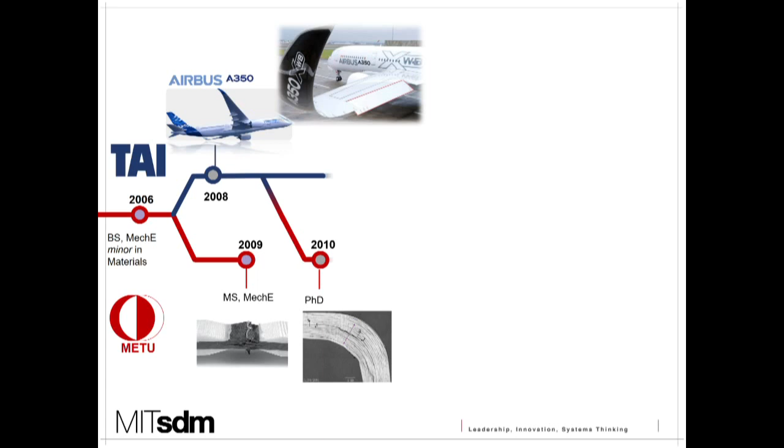Meanwhile, I pursued an MS degree in mechanical engineering, continuing to work and continue my endeavor in academics in parallel. In 2010, I started my PhD program, which was motivated by my work at TAI. In 2013, we had the first flight of the A350. Meanwhile, I also helped on other projects, the Boeing 787 and the Airbus A400M. In 2014, I graduated with a PhD.

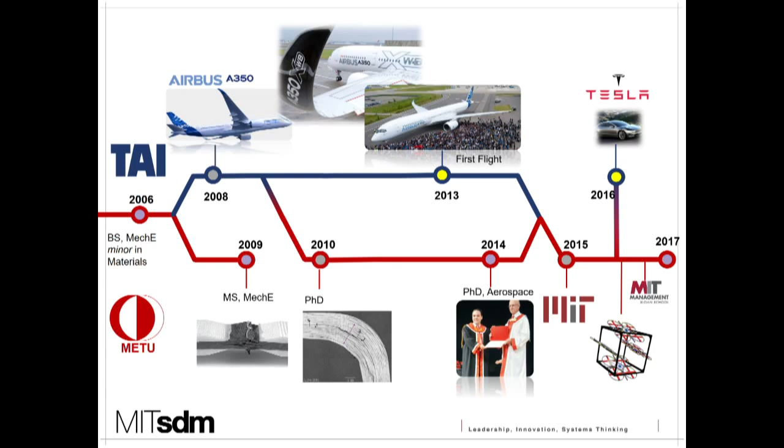In 2015, I decided to switch to the business side of engineering, so I came to the SDM program at MIT. Afterwards, in 2016, I interned at Tesla Motors in Palo Alto in the program management group for Model 3 cars. Meanwhile, I worked on different projects such as drone projects, and also worked for MIT Sloan School.

Specifically at MIT Sloan, I founded a club called the Systems Thinking Club, and I am currently conducting the president role in the club. We embrace students, faculty, and alumni who like to work on systems thinking in businesses and engineering. We organize seminars, join conferences, and join competitions. Right now we have more than 170 members.

In the School of Engineering side, I worked on development of scalable drone systems, optimization of design, and statistics and machine learning. Right now I'm working in the MIT Sloan School system dynamics group to model product development from different perspectives. This project will be used in executive education at MIT Sloan. Eventually it will be a simulator.

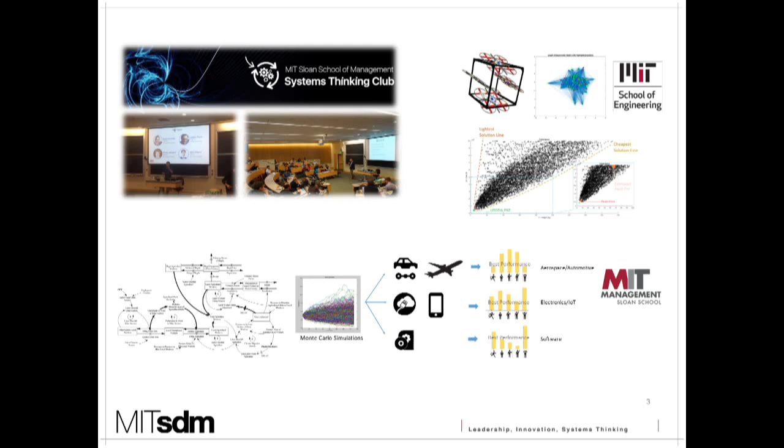For this subject, we started the project after winning a competition organized by NASA last year. It was a product development and business case competition. We won the competition with the SDM students, my SDM fellows, in the airborne wind energy category. So let's return back to the presentation.

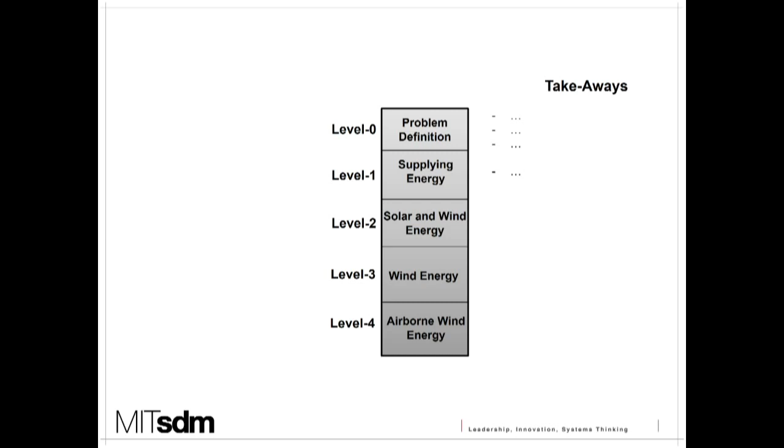I like the system architecture class at SDM, and I try to follow the same process. I start with level 0, the top level approach to the problem, with the problem definition. Then I go down to level 1, which is supplying energy. At level 2, I go to renewable energies, which is solar and wind energy, then go to wind energy and airborne wind energy at the end. You can think of this as a reversed tree, where the trunk is at the top and the leaves at the bottom, like a water drop finding its way naturally to an optimum solution. I try to follow such an approach today, and we will have some takeaways from each level.

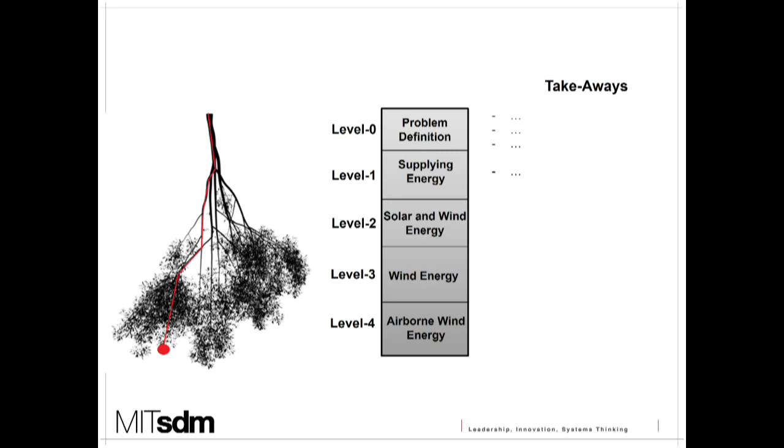So let's start with the problem definition. The problem definition is so simple and so straightforward, actually. It is that 1.1 billion people right now, today in 2017, have no access to electricity. That is almost 20% of the total population. The deficit is concentrated in rural areas, especially in sub-Saharan Africa and South Asia, as well as East Asia.

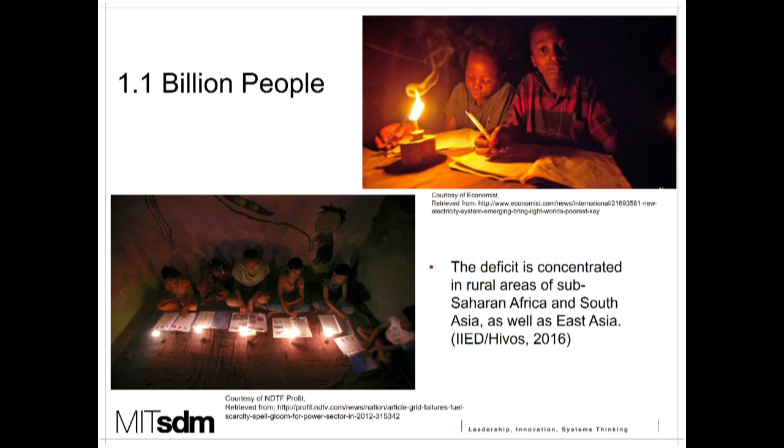So after I saw those pictures, I opened the World Bank's map, which shows the annual energy usage, provided in terms of kilogram of oil equivalent per capita. If you see the link below, you can click that and see it yourself. It shows a color map.

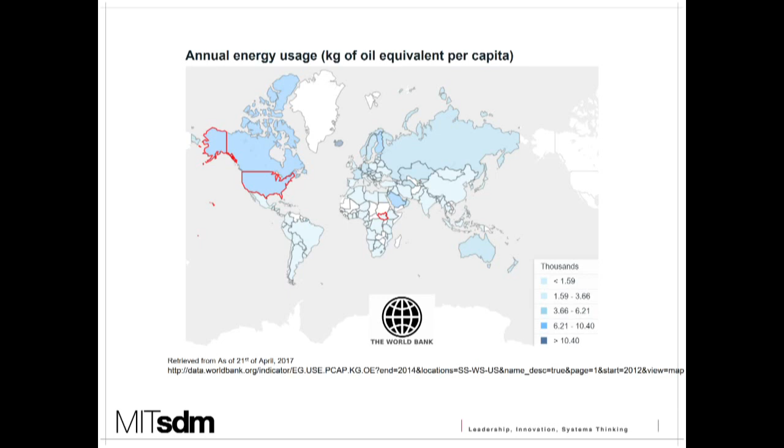Once I look at it, I see the US has a darker blue color, and Africa has white. So it looks like we can understand it. But if you get into details, let's look at what the energy consumption actually is.

In the United States, one person's average consumption of oil is 7,000 kilograms. For France, it is almost half, like 3,600, so two people there can have the same energy consumption as one American.

Then I look at my own country, Turkey. It seems like 4 people can have the same consumption. So far, it is okay — it's based on the development and industry, so we can explain it.

And I just wonder what happens with South Sudan. Now, I just picked one, by the way — I didn't take the minimum or anything. So this is what happens.

Especially, I put this animation slightly slower, to count how many people can survive with this same consumption. It is 118 people with the same energy consumption — it is enough for 118 people in South Sudan.

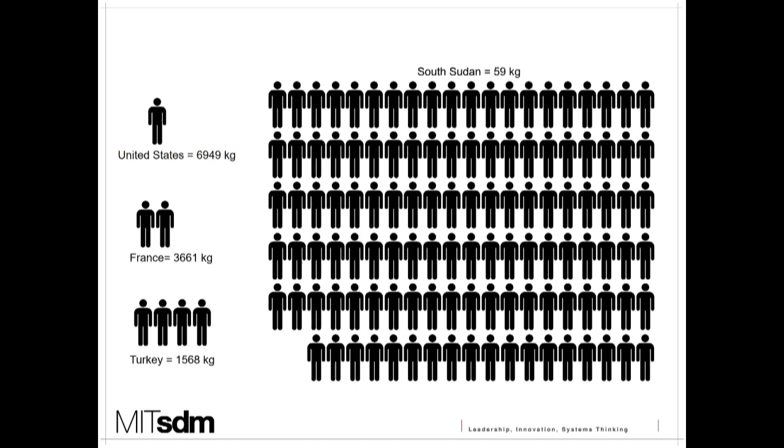So I try to understand this. What can be the reason, and how can we solve this, and how can we make a better energy distribution? So I'm going to show a system dynamics, very simple causal loop diagram.

Whatever I show by arrows means it increases. The first one is the cause, and everything starts with fundamentals: food, protection, education, and health. These are the fundamental human needs.

And this creates some energy consumption, and we provide the energy supply. The difference is the energy satisfied — so the demand of energy is satisfied. What happens is prosperity.

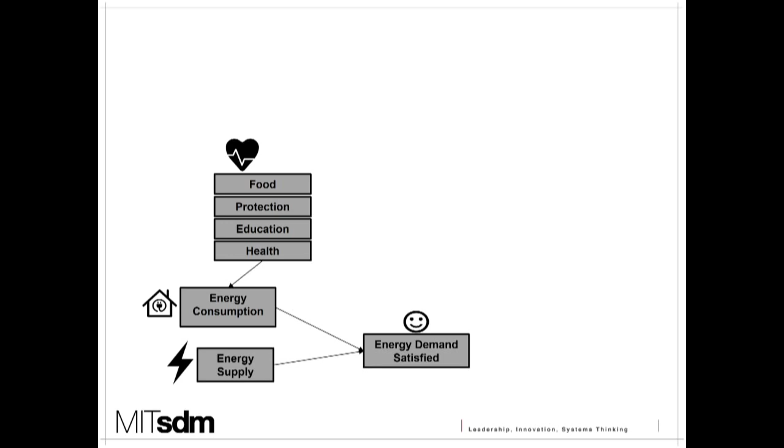There is some prosperity satisfied by the supplied energy. So what happens is this: we start to dream bigger.

And this is based on the hierarchy of human needs. Starting from safety and food, people start to self-actualize themselves and try to dream bigger. But there is something called capacity, and it is confined by resources and also the potential of the people specific to those countries or communities.

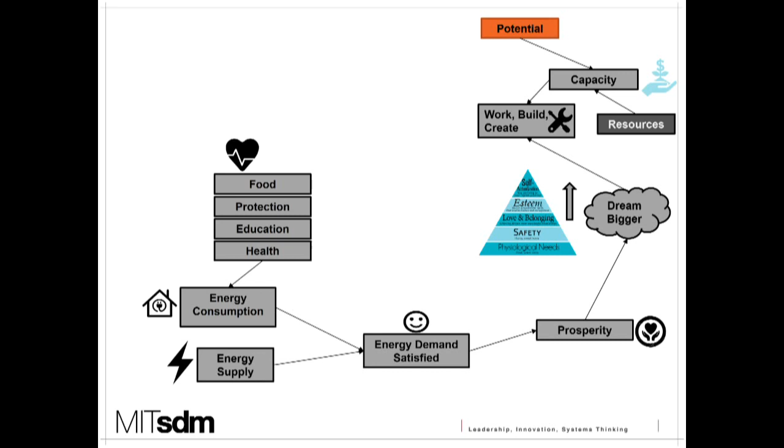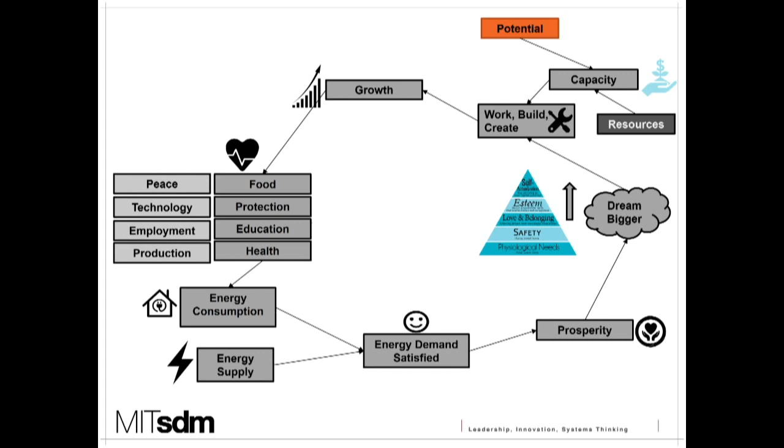And based on the capacity and dreaming bigger, the self-actualization, people start to work, build, and create. This creates growth for food, protection, and education. But meanwhile, with this loop, there is another aspect of growth, which is employment, jobs, production, technology, and peace.

So this gives rise to potential. Potential increases, and eventually this loop becomes a reinforcing loop. This is the development of the community. So the energy consumption increases as we supply energy to those countries.

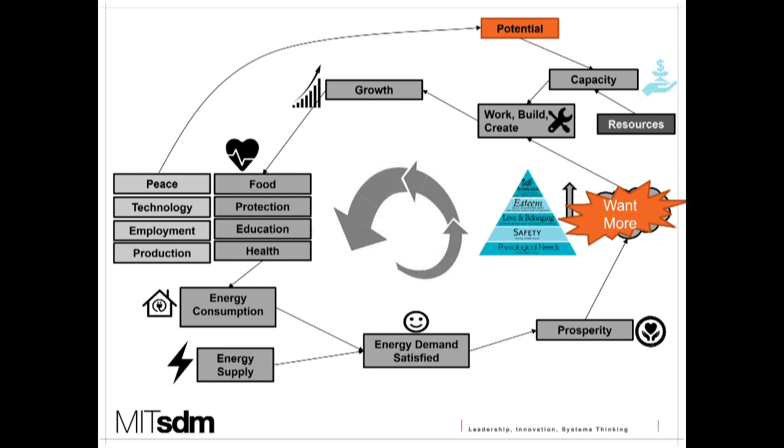But after a while, of course, this dream shouldn't be just 'want more' — I don't go to that level, but at least people try to self-actualize. As we give more energy to them, the loop reinforces itself, and there will be more energy consumption. This is the typical S-curve, bounded by resources and potential, showing energy consumption versus time.

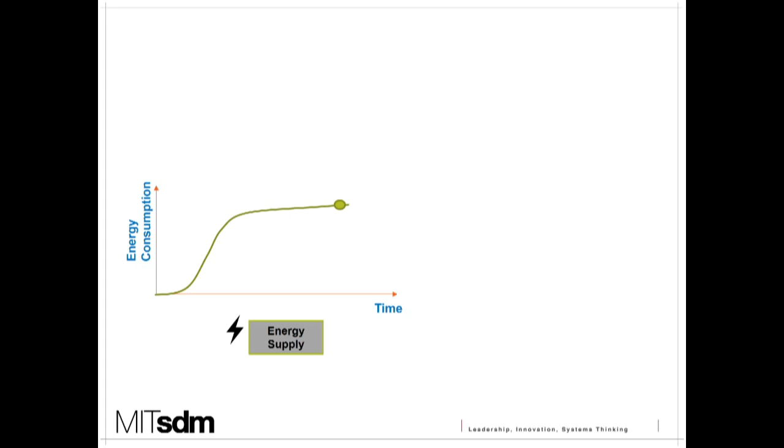Right now, the dot shows the underdeveloped countries. As you give energy to them, this consumption increases and increases over time. And developed countries, OECD countries, are almost saturated at that level — there is still an increase, but very slow and gradual.

And developing countries are increasing — least developed countries didn't start that journey from the same point. So 50 billion a year right now until 2030 is enough to provide electricity to the whole world.

So I mean this: let's have these people live their potentials and reach their potentials, and let them go through this S-curve.

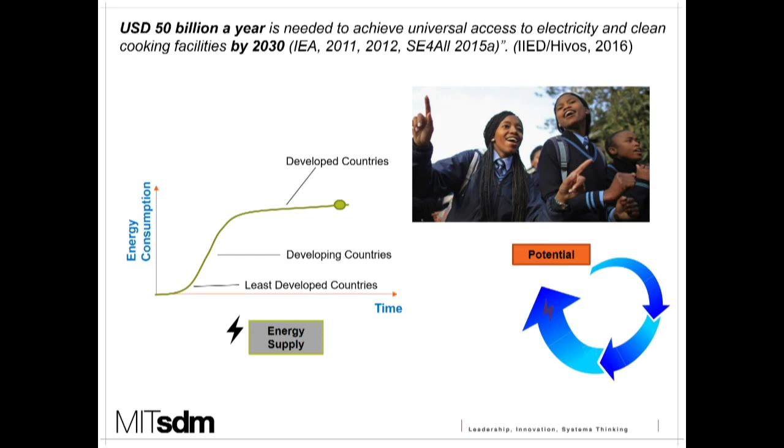Actually, my idea to show these slides at first is that we know to develop underdeveloped countries or help people, we need to make a handshake between the investors and OECD countries with the poor people. So I mean there is a huge inequality in energy consumption.

But a snapshot, today's snapshot of energy consumption or the market in those countries, does not reflect the real market. It is just the beginning of the S-curve. There will be a huge demand in the future — as I'm going to show in the next section, it has actually already been happening right now. So simply invest in their potential and provide the energy need in an increasing way.

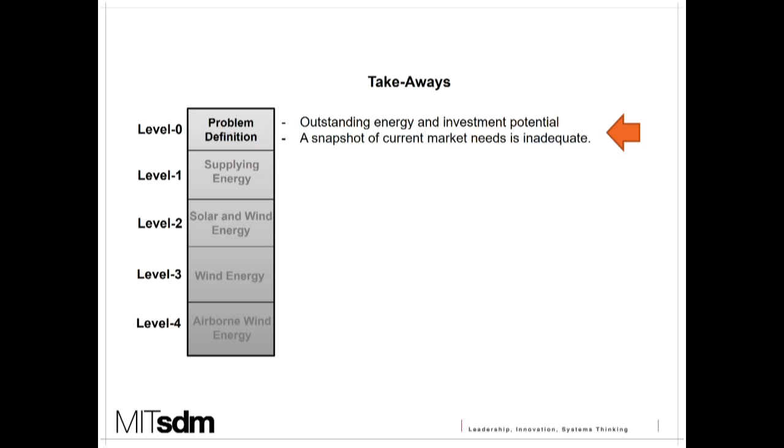So this is level 0. I only take two takeaways from this one: it is outstanding energy and investment potential for developing countries, and the snapshot is not adequate in terms of energy needs right now today. So let's supply the energy.

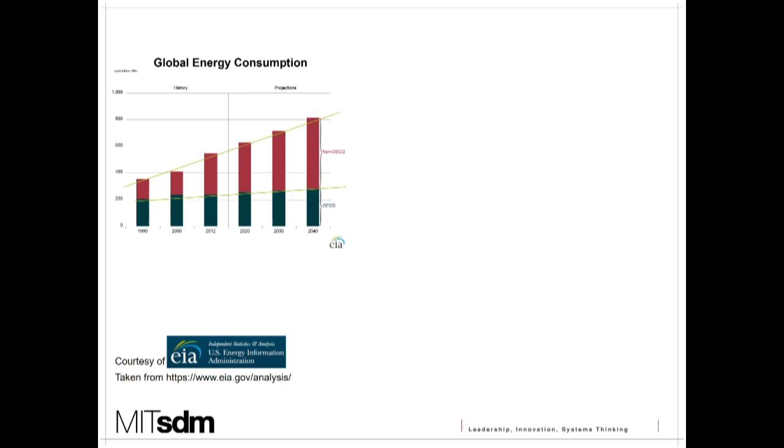So let's go one level down. This is a graph from the U.S. Energy Information Administration. You see the history and projections based on global energy consumption between non-OECD and OECD countries. As you see, the OECD countries have almost saturated - there is still an increase, but very gradual. The non-OECD countries keep increasing because of the loop I showed you in the last section. They are going through their S-curve to have more energy need. They have already dominated the energy need, but it will be much more obvious in the future.

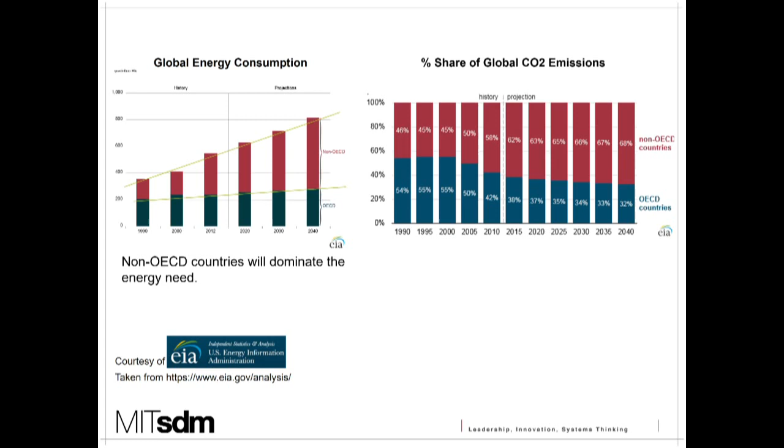But there is one thing: energy means sometimes CO2, especially with fossil fuels. This is a projection of the CO2 emissions share between OECD and non-OECD. It is so obvious that in future, and already begun, the majority of CO2 emissions will be coming from non-OECD countries.

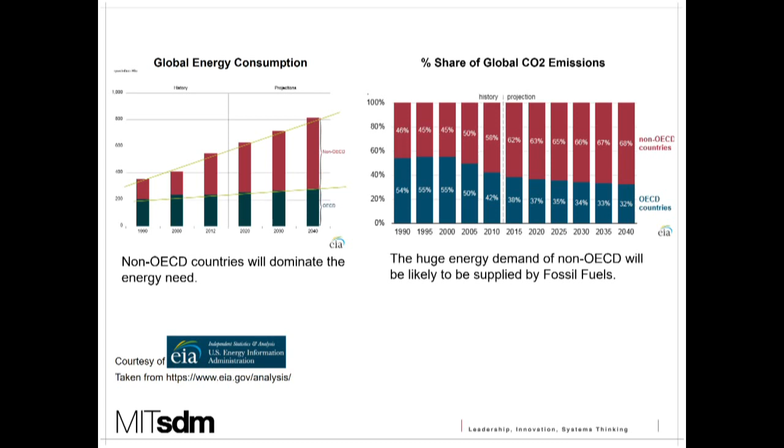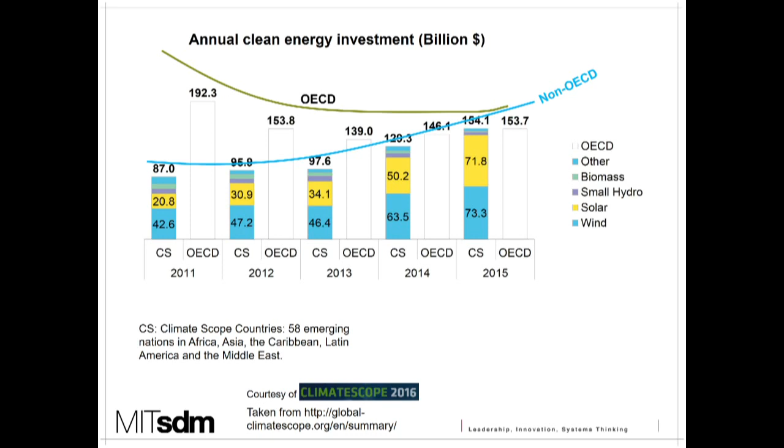But hopefully, luckily, the annual clean energy investments has already begun, and the investment for non-OECD countries has already surpassed the OECD countries. If you look at the graph, CS here means the Climatescope countries - 58 emerging nations in Africa, Asia, Caribbean, Middle East, and Latin America. As you see, the non-OECD CS countries here is a bit more specific - we don't have China here - and it has an increasingly increasing investment. The OECD has even a decreasing one, but slightly increasing, probably after recent concerns on green energy. So there's a huge potential.

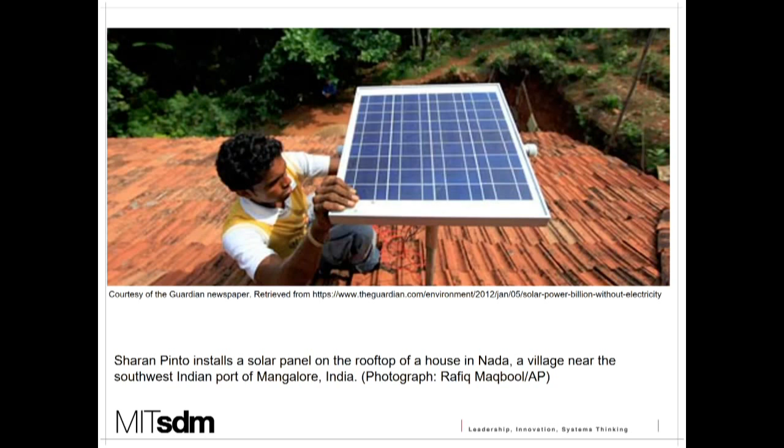This picture gives a good understanding of the situation. You can understand why most of those people have no access, or these grids are not possible for them to have their electricity. That's why most people are looking for some mobile and off-grid solutions, such as solar panels. Solar panels are quite good at this, as I'm going to mention in the following slides, in terms of cost, weight, mobility, etc.

So investment in off-grid energy is huge. The demand is huge, but only 0.2% of what is necessary is actually supplied. Right now $23 billion is required additionally to have the adequate investment in off-grid energy, but unfortunately it is only 51 million per year.

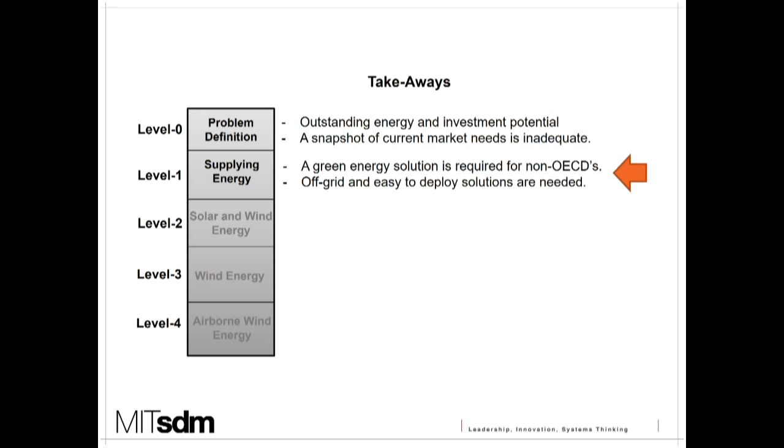So let's go to solar and wind energy. Let's get into the renewable - what is happening there? At first, people think solar energy and wind energy are competitors, that they are competing with each other. So are they two friends having this arm fight between each other? Is this the case? Actually, it is not.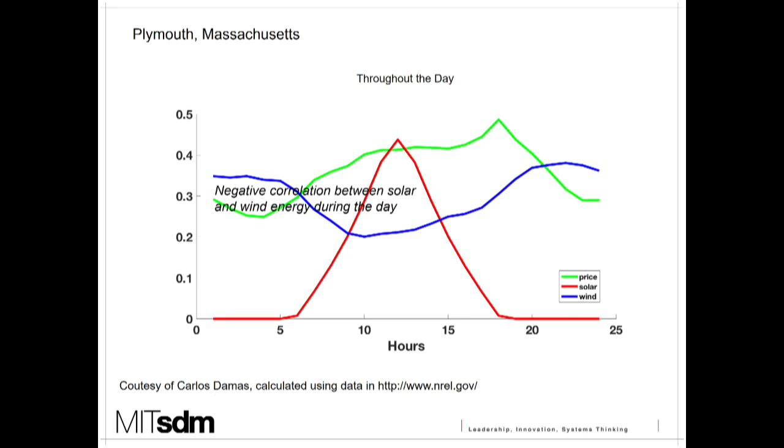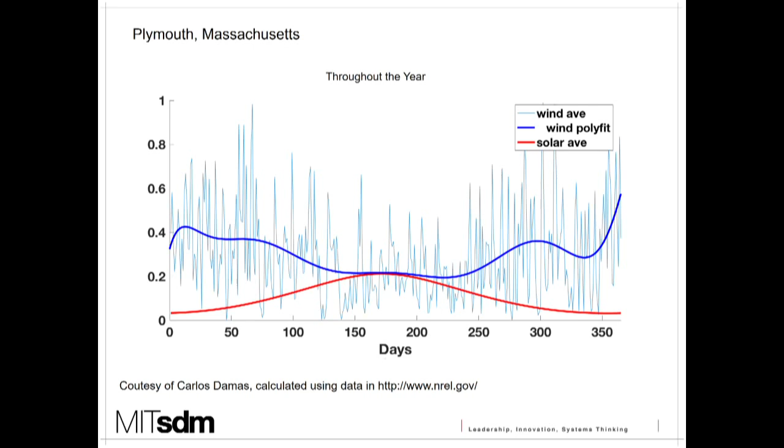And see what happens per year - yeah, there is a negative correlation between wind and solar energies, and throughout the year it is almost the same actually. This is showing - the mid-region is June, around day 160. So you see in summer we have more solar energy, and in winter we have more wind. So these guys also have negative correlation between solar and wind energy for both day and year. Actually, if you look at one country, Germany, you can see throughout the year Germany uses PV more in summer, but wind energy in the winter.

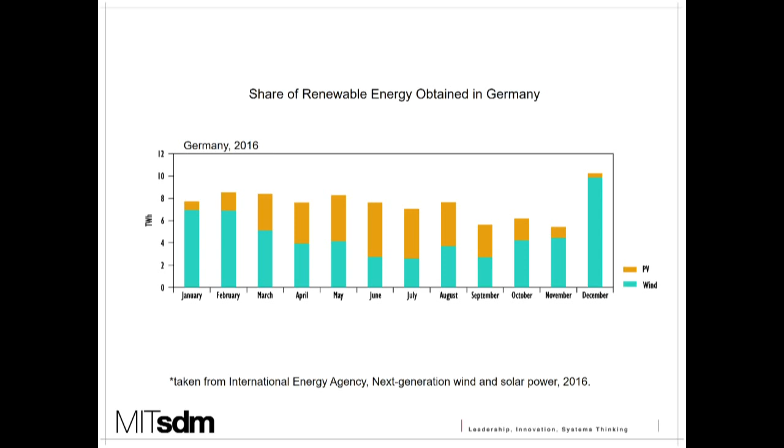So eventually you have a quite constant energy supply around 8 terawatt hours throughout the year by using the two technologies as complementary to each other in a hybrid way. So yeah, they're actually good friends. But let's get into details of cost. The story is a bit different in terms of cost for these two friends.

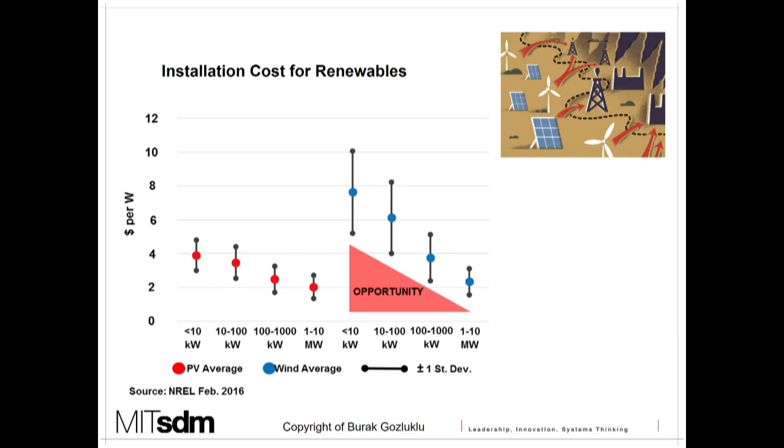It is okay. But if we go to wind energy, it is not the case. Wind energy is quite competitive at higher energy supply, but for a smaller amount, such as less than 10 kilowatts or 100 kilowatts, which means a huge energy supply for people in non-OECD countries, it is not cost competitive. And unfortunately, the cost competition probably won't happen in the near future.

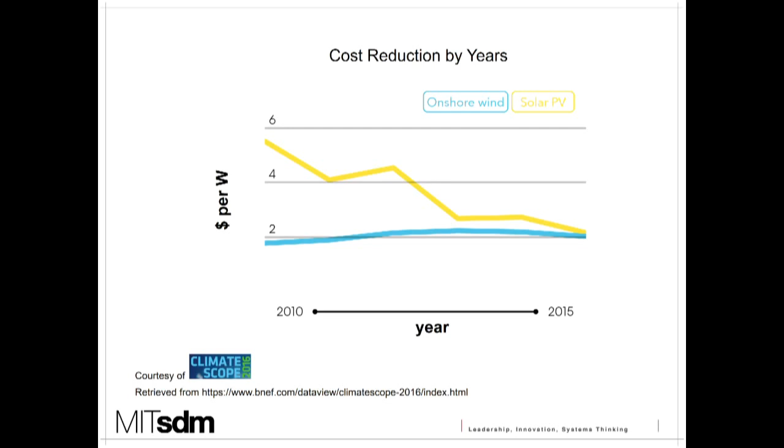This shows the cost versus time, and it shows the change of the cost per year. As you see, solar power is very good at reducing its cost. Each time, it is going down and down, even below $2 per watt. It probably has reached that level. But onshore wind energy, actually there is no change. It just stays at $2 per watt. So there is not a big thing happening here.

Sorry. So for this mid-presentation level 2 conclusion, I'll take it that solar and wind energy are compatible, not substitutional. Solar power is getting cheaper every day. On the other hand, conventional onshore wind turbines are expensive and look like they are not getting cheaper. And the takeaways are: solar and wind energies are complementary, and low capacity onshore wind turbines are not cost competitive.

So let's go to wind energy. In our journey, we are trying to find the problem and propose a solution. So in this presentation, I'll show you a short crash course. No worries, it's a short one, because we will need those very simple equations in the following slides. So what is wind energy? Actually, the energy in wind is stored as kinetic energy.

As we know from high school, it is 1/2 m v squared. Here we take m as the volume times the density. If we calculate the volume as speed times t, which is x, times area, which is the swept area for a wind turbine, we come out with the power, which is the energy per time. So it is 1/2 A times rho times v cubed.

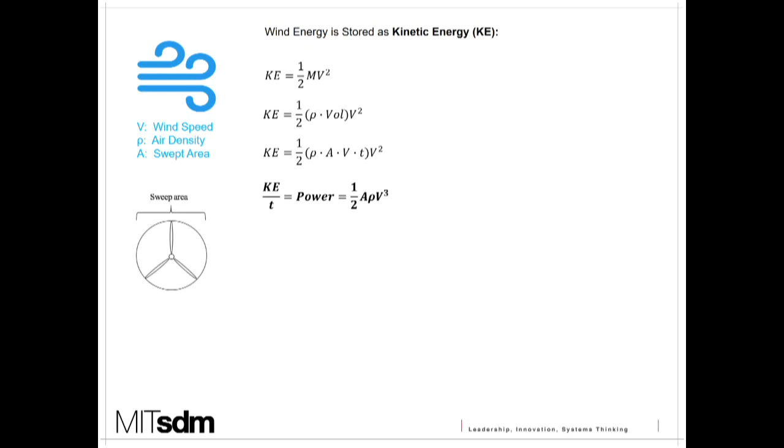The maximum harnessable power is something different. What we can get from this energy is based on the so-called Betz limit, a theoretical value that we cannot exceed. It is around 60%. And harnessed power is based on the efficiency factor, which depends on your design, whether it is airborne, a wind turbine, or whatever. This is the efficiency factor that we can play with. And the total thing we consider is the capacity factor for wind turbines, which is 40

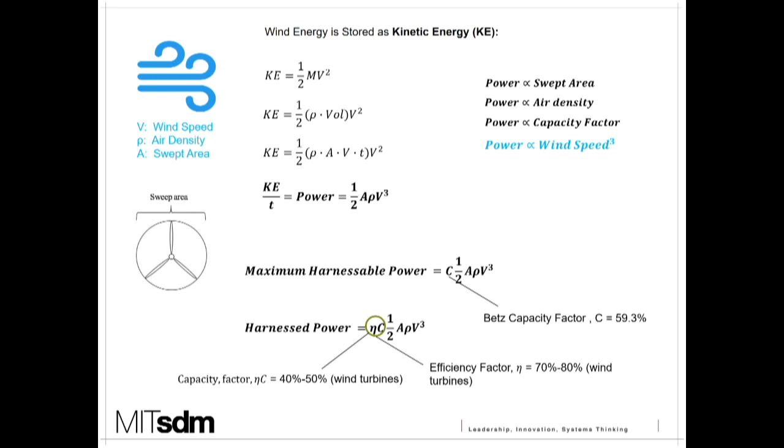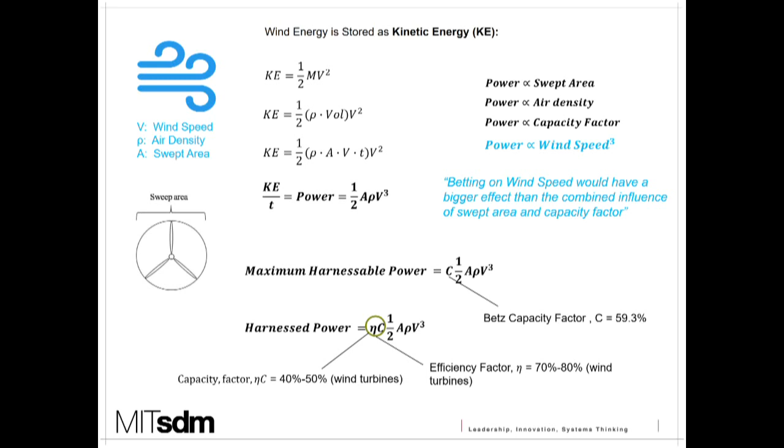to 50%. So far, what we see and intuitively expect is that power is proportional to the swept area, air density, and capacity factor. But what is important is this: power is proportional to the cube of the wind speed. So wind speed cubed is very important. It means betting on wind speed would have a much bigger effect than the combined influence of all the others. This is the end. I said it was short.

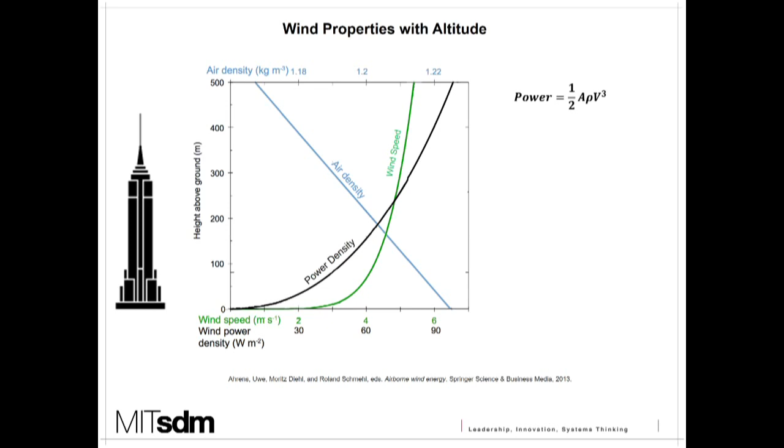As we know, wind speed has a cube effect, so the multiplication of those is the power density. Power density increases as we go higher in altitude. It means as we go higher, we have more energy. And of course, there are some effects such as the landscape effect, which we call the frictional layer. In a city core, you have to go much higher. In open land, you don't need to go as high. And offshore, it is much lower elevations.

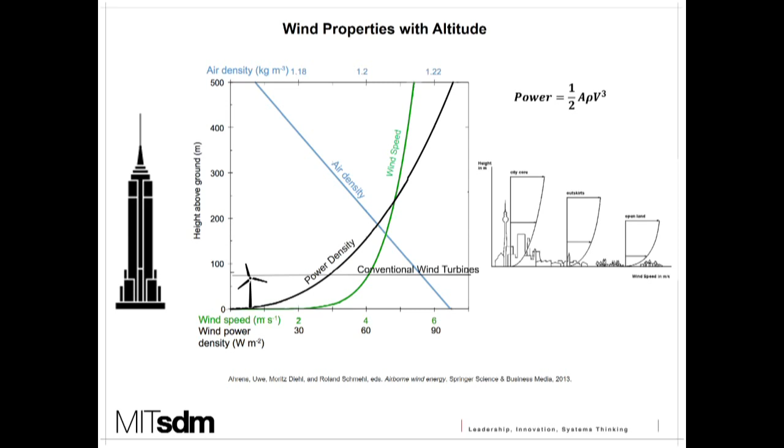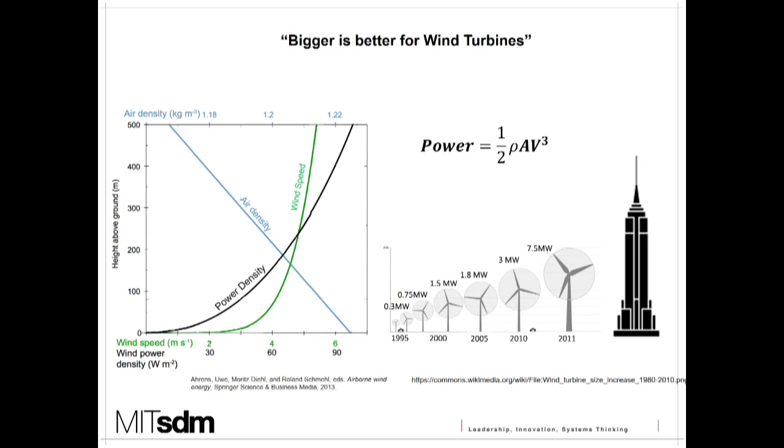And as I mentioned before, the economies of scale in wind turbines are very important. So you are reducing the cost as you increase the size, but they have some problems, as I'm going to mention. So in terms of design optimization, I would like to touch on this. So we have an objective function. It is maximizing the power, and the power equation is this, and don't consider the efficiency right now. So it means the maximization of swept area and maximization of altitude. It means maximization of wind speed.

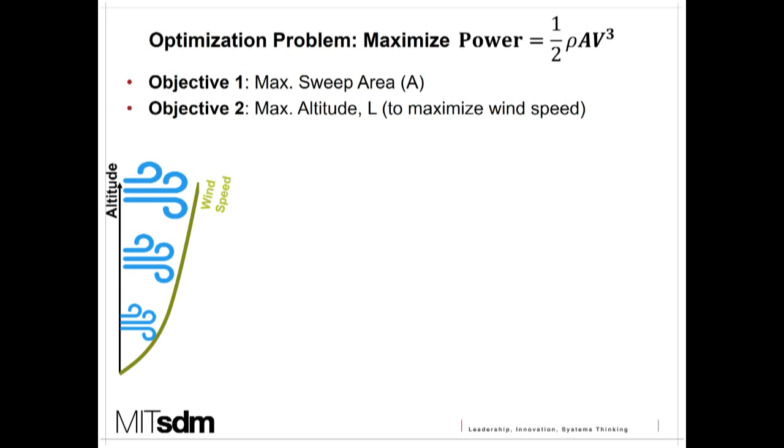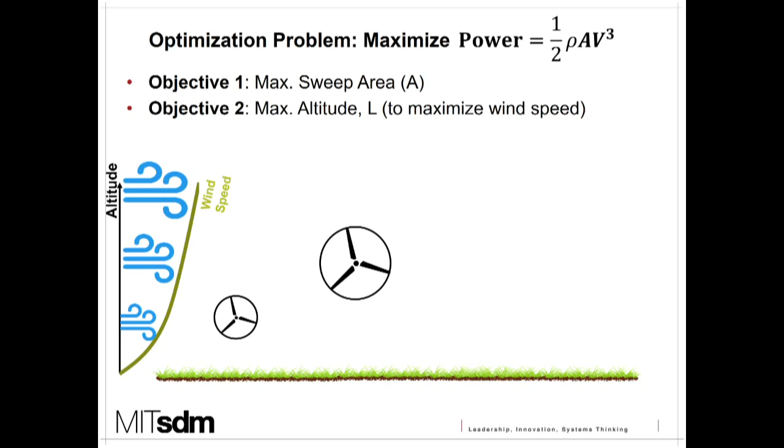So we know that the wind speed increases at higher altitudes, and let's put our ground and put a smaller wind turbine at the lower altitude. So to optimize it, I go higher with a bigger wind turbine, and I go higher with a bigger wind turbine. And of course, A3 is bigger than A2 and A1, and altitudes are increased. So higher altitudes, and it means A3 has the highest wind potential, has the highest wind speed. So it looks like I'm going pretty well in terms of maximizing the power, like this.

But there is one thing here that I would like to mention, and it is the force, wind force. So the wind force exerted on the wind turbine is also increased here. And it is almost the same effect like the power. So for F3, we have a huge force pushing backwards on the wind turbine. For F2, it is smaller. For F1, it is much smaller. So of course, we have to put those guys in the air. So I put some towers like that.

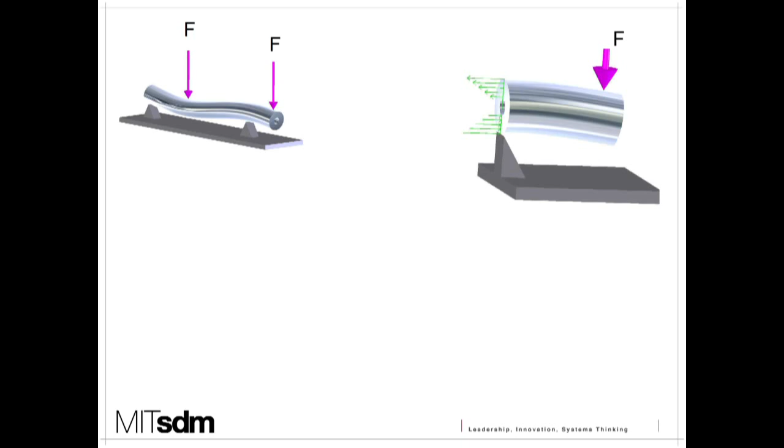So we have to make a small crash course again to understand what's going to happen in the next slides. So this is the beam under bending load. In bending loads, at the base we have what we call a moment, which resists the load at the tip. It is proportional to the force times the length. You have a higher force, you have a higher moment; you have a higher length, you have a higher moment.

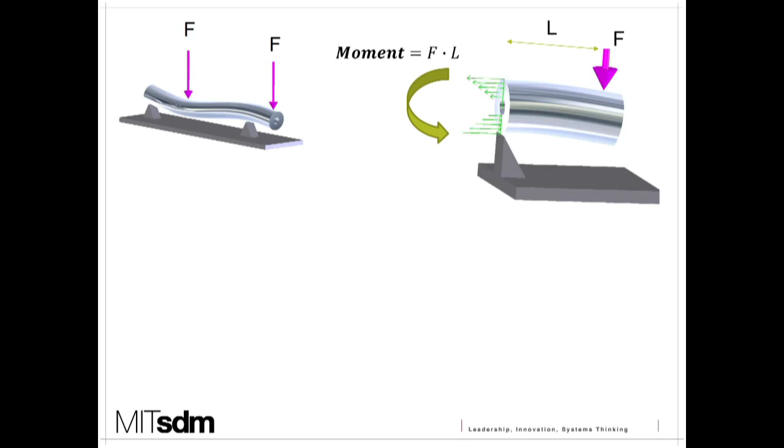So stress, which happens at the base and which leads to failure of the whole system, is proportional to the moment. And the stress, for a circular one, is F times L over a geometry term, the cross-section of the geometry. So the takeaway from this course is this: the stress to withstand is proportional to F and also proportional to L, which is the length of the tower, of the beam.

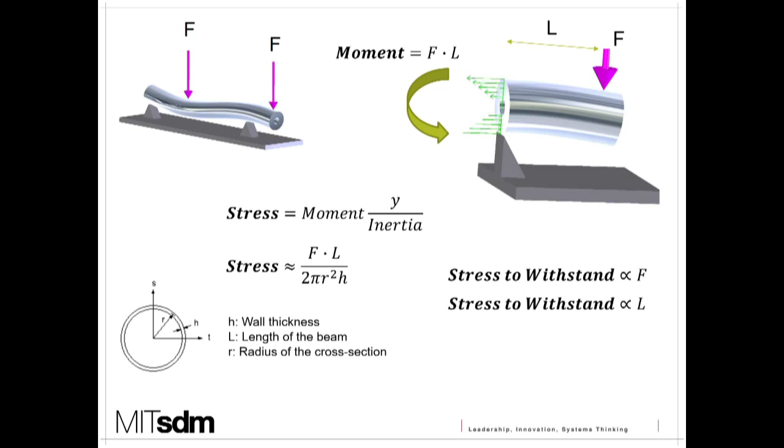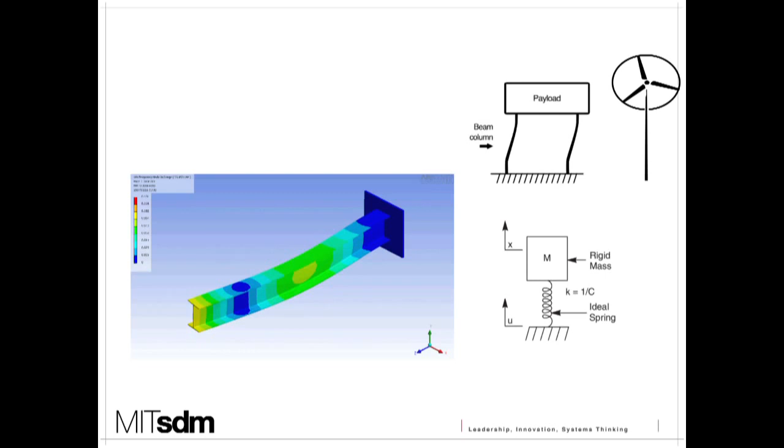And I don't even mention the vibration issues, which have a much higher effect in terms of a slender beam carrying a payload at the top, which is the wind turbine blades. The situation is much more severe here, but anyways, let's skip that point. So, yeah, this was the slide that I left. So what happens is this.

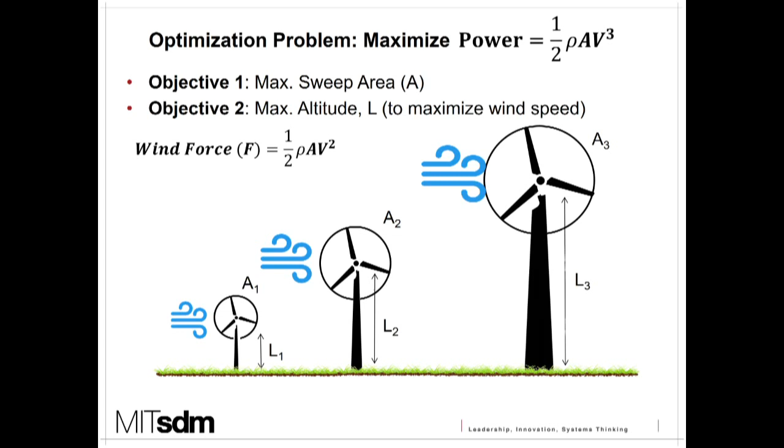After this course, I think we learned that we have to increase the thickness, the size of the tower, to sustain the loads and to have adequate stiffness for the vibration issues, especially having a rotary system on the top of a tower. I mean, the turbines are rotating, so they are creating a harmonic excitation to the whole turbine. So you have to increase the size in an increasing way. So at the end, you have a solution like that.

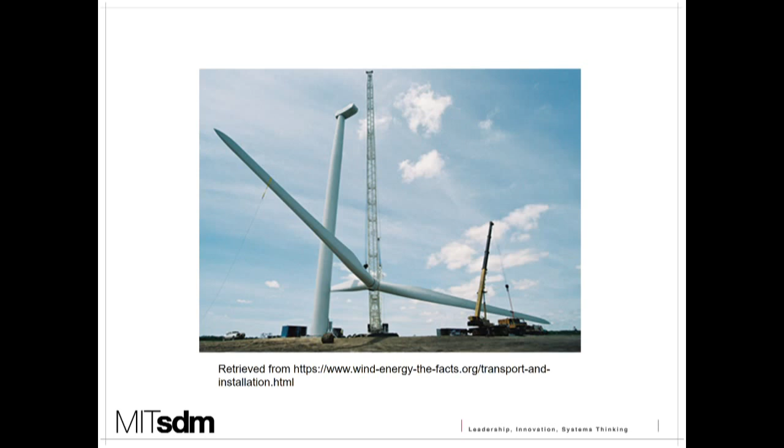So why does it happen? Actually, again, another S curve. This is our second S curve in this presentation. It is simply that wind turbine technology has almost saturated in technology achievement so far. It was shocking to me once I realized that wind turbines were first used in AD 500, thousands of years ago, in Iran, and in the 19th century, in the 20th century. So there is development, but the solution is almost always the same. Right now, the biggest contribution in terms of technology is the materials, the lightweight materials.

Right now it is the carbon fiber reinforced composite materials. In future it can be different, lighter materials. But still, right now it is a strength of materials problem instead of a power or energy supply problem. And maybe some energy conversion and also some gearbox, but mainly the size is the issue, which means the weight. So the material technology is the driver here.

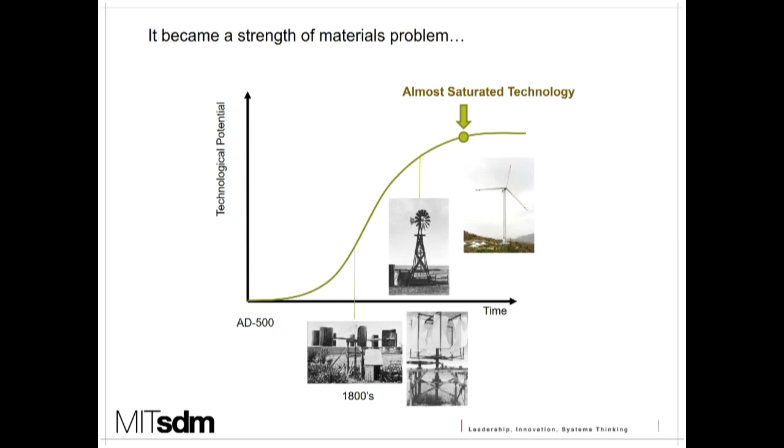So the presentation conclusions: conventional wind turbines are only cost competitive at high scale power production, very good at economics of scale. Unfortunately, because of the size and the weight, which is definitely unavoidable, they are not mobile, not effective for off-grid applications such as for developing worlds. It is so hard to carry huge wind turbines. And it is not modular, transportation is a problem.

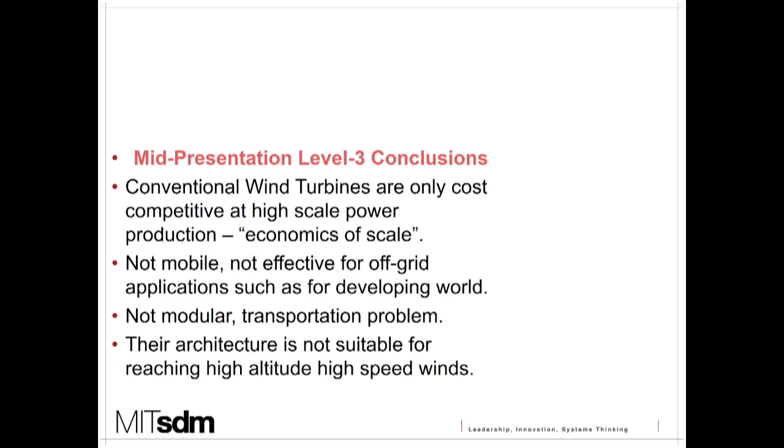And the architecture is not suitable for reaching high altitude, high speed winds. So it looks like reaching to the clouds with a ladder. So it is much more convenient to drop the ladder. So for this level 3, I take only 2 of them. The architecture of conventional wind energy does not allow us to reach high potential, high altitude winds. And conventional wind energy is not mobile and only good at economics of scale, which is unfortunately not very applicable to most of the non-OECD countries, which have a huge potential in terms of investment in future.

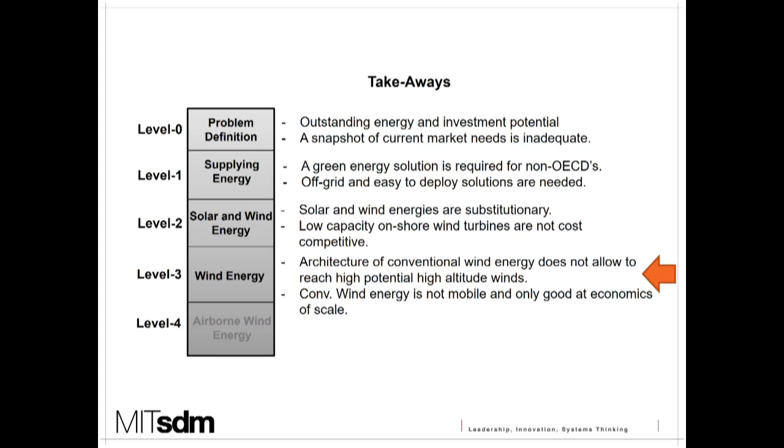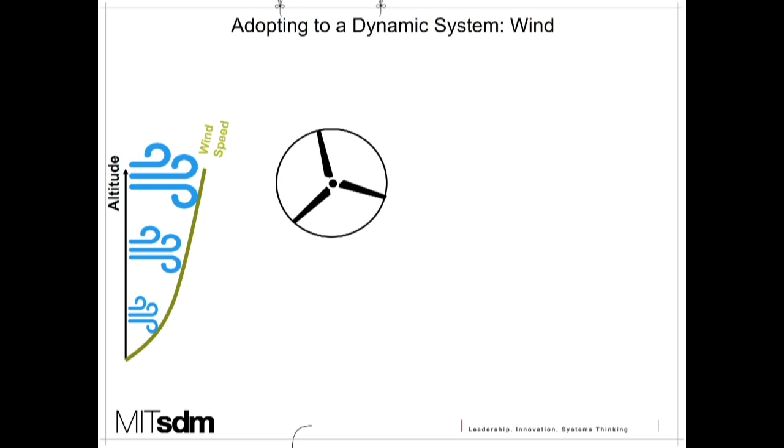And so I'll start to talk about airborne wind energy, AWE. Okay, let's return back to our problem. So we have a wind speed. It is increasing at higher altitudes, and we have the wind turbine. So what we learned is the tower is a big problem, so let's drop the tower. But here we have to keep that in the air. So we have gravity, right? So we have to put something to keep it over there. So we can put some balloons or some buoyancy systems and connect it to ground with a tether. This can happen. And there are solutions like that.

But for that, in terms of system thinking, I'm not so sure it's the best solution in terms of adopting the wind energy. I tend to see the wind atmosphere as a dynamic system, and whatever you put somewhere as a static one just stays over there all the time. So this is a dynamic system. It tries to move, and you have to come up with a puzzle to fit in that dynamic system in the best way.

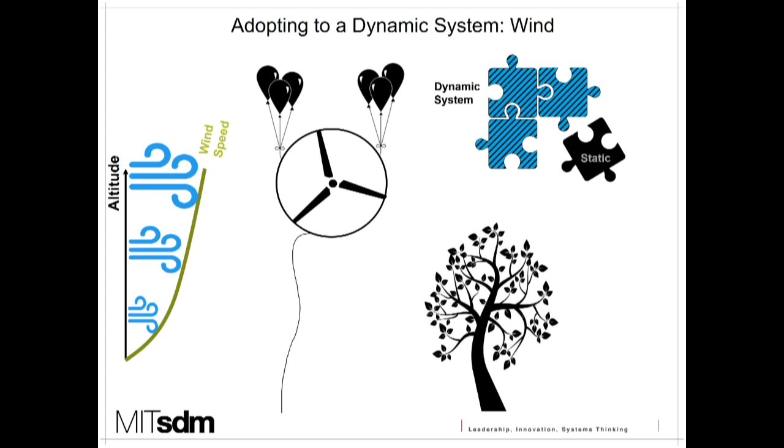So I generally like to watch nature. I always try to get inspired by nature in my designs and all my work. The current static solutions look like a tree. But what we should do is be a bird. I believe a bird is much better at adapting to dynamic systems such as wind. So we should think more dynamically with today's high technology, and we can do it. So this is the main motivation.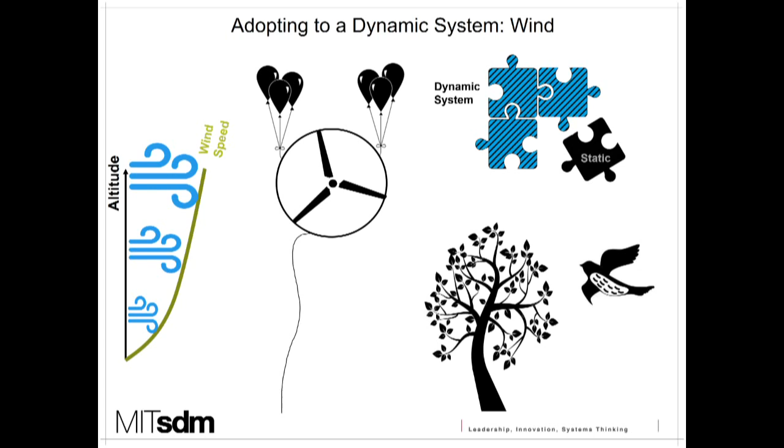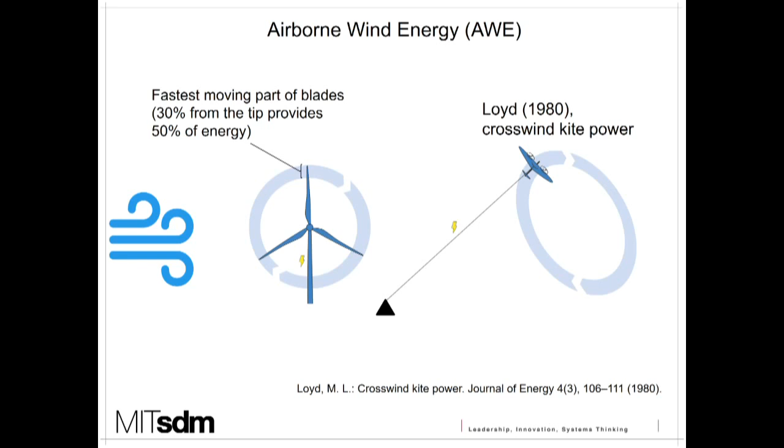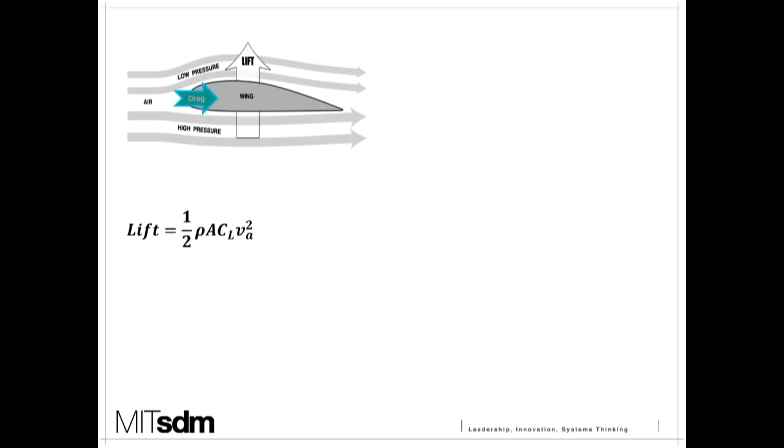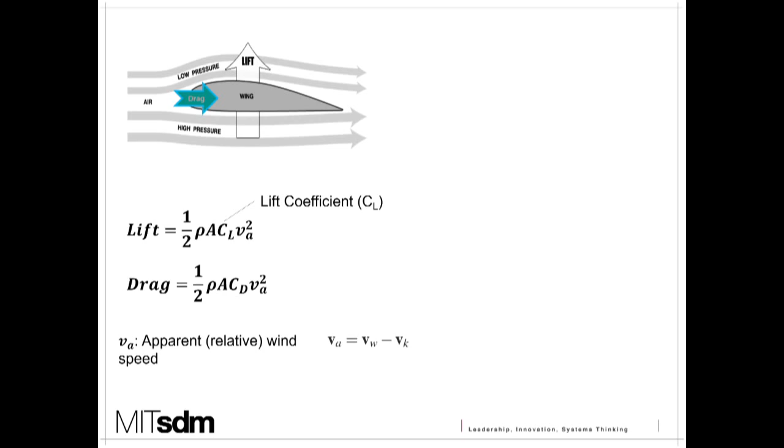And lift, without getting into the details, is proportional to the square of the velocity difference between the air and the wing. This is important because it is not the wind speed. It is the relative speed between the wind and the wing. And we have a lift coefficient which determines how aerodynamic your system is, and we can say the same thing for the drag coefficient.

And you can play with the CL and CD based on the angle of attack. This is what happens once you fly with an aircraft. The ailerons, for example, in A350, are used to change the angle of attack and roll the aircraft, and it changes the CL and CD. So, yeah, this is the end of the course.

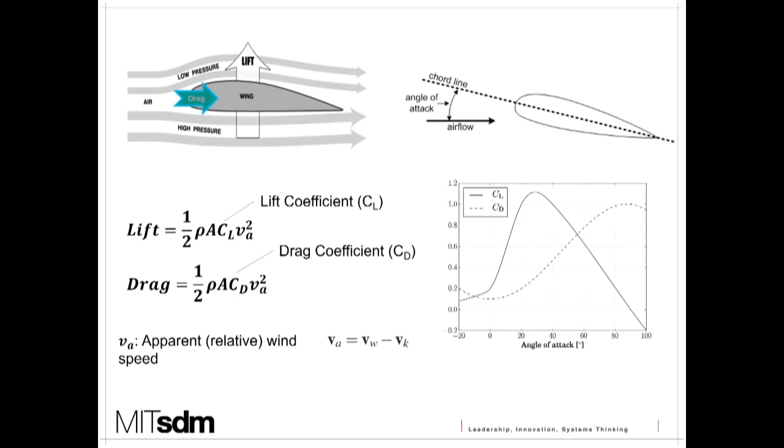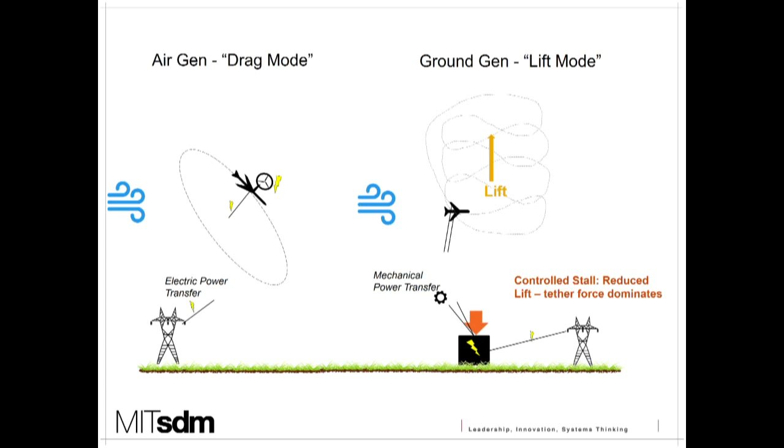But what you do is you transfer the mechanical energy to the base station through the tethers here, the tethers which also control the aircraft. And this mechanical energy is converted to electric energy on the ground. So we call this the reel-out state, and the lift dominates. And while it goes down, it is a controlled stall, which is reduced lift, and tether force dominates. So it is this reciprocating motion going up and down based on this ideal loop.

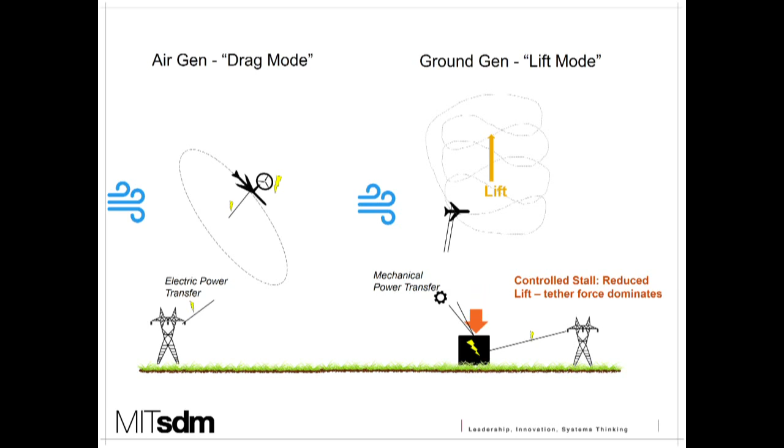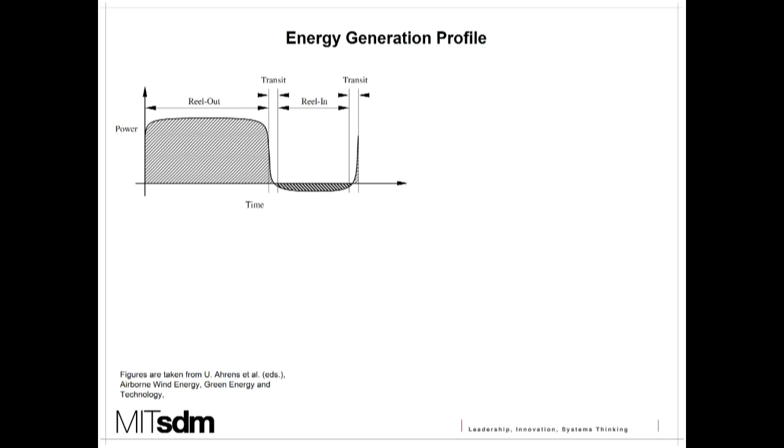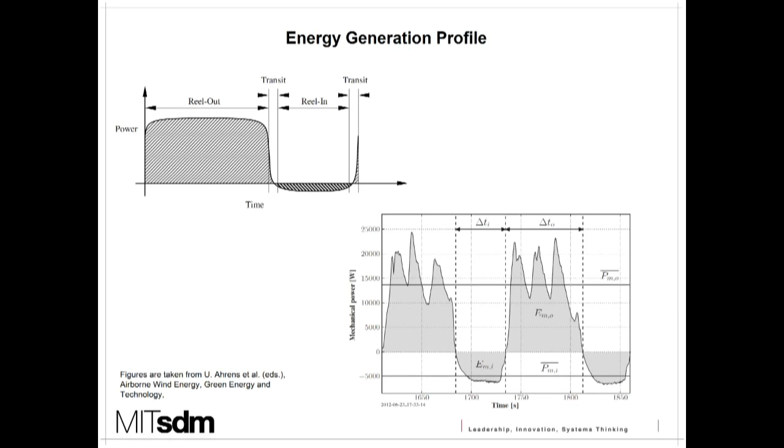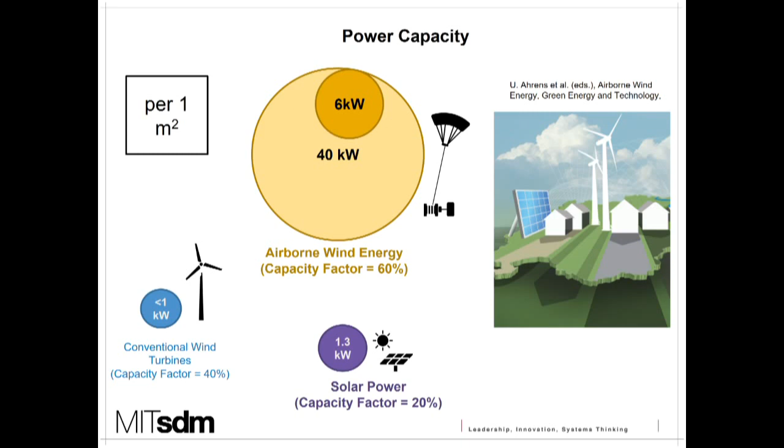And installation cost. As you expect, we don't have any tower here, and we don't have big components, so it is very cost effective in terms of material and also installation cost. It is only $2 per watt, and it is getting reduced toward $1 per watt. For solar power, it is 3.8, and it is going to 2 in today's values. Conventional wind turbines are about $4 to $6 per watt. So it is cost effective too.

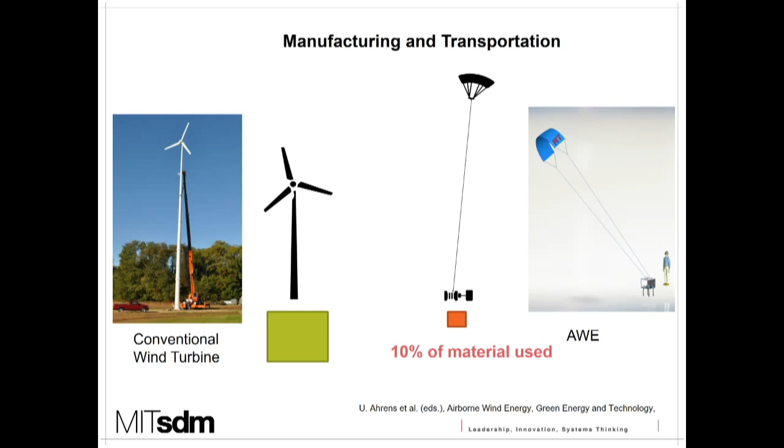And in terms of manufacturing and transportation, this is one of the main value deliverables in this idea. It is very small. It only requires 10 to 15% of the material used for a conventional wind turbine. As you see on the right, you have just a base station which controls the tether and the kite, and you have a kite, which can be a flexible, lightweight one.

But of course there are some challenges for the AWE. One of the big challenges for this technology is control and reliability, as we expect. You have to control the kite and keep it there all the time. This was one of the reasons why Loyd didn't pursue it when he first proposed it in the 1980s; it wasn't so possible. But with today's high-speed computers, machine learning algorithms, or fuzzy logic algorithms, there are teams who successfully control the kite.

The kite is moving through a stochastic system, which is sometimes quite turbulent. You have to reach the high wind potential, and sometimes go to higher altitudes to find higher wind speed. Meanwhile, you have to keep it there all the time; you don't let it go down. So reliability and the control system are two of the most important challenges. But right now there are very promising results, and there are companies, as I'm going to show, working on this technology.

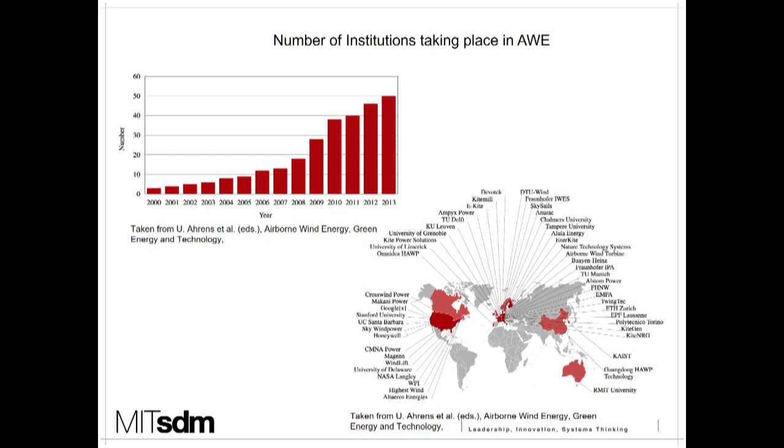Right now the number of institutions is growing and more people are getting on board. As you see, it boosted after 2009, 2010, and in the bottom right figure you see almost 50 institutions, including universities and companies, working on this technology, which is quite promising, could be really disruptive in wind energy, and a very good complementary solution to solar energy. Unfortunately, MIT isn't in this figure, but here we are five students working on this technology.

Carlos, my friend, has an energy background. He's a mechanical engineer and is pursuing another master's degree in mechanical engineering at MIT. I'm Burak; I introduced myself at the beginning. Jack is also in our team. He's a mechanical engineer and an operations guy, pursuing a PhD in the mechanical engineering department at MIT. Nan is our electronics and computer science guy, pursuing another degree in the EECS department at MIT. And Charles is our mechatronics guy, and he's an SDM fellow like me.